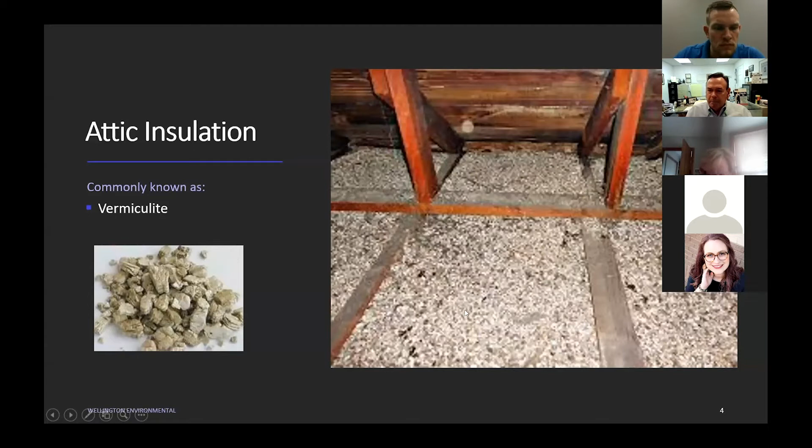Now, vermiculite, if you've seen it before, it kind of looks like cat litter in some respects, or it looks kind of like potting soil. This is what it looks like in an attic when you uncover it. Sometimes it has fiberglass on top of it or other insulation on top of it. But this is what we call vermiculite. It looks like mica, and it's very lightweight, and it was easy to get, and we'll talk about where it came from.

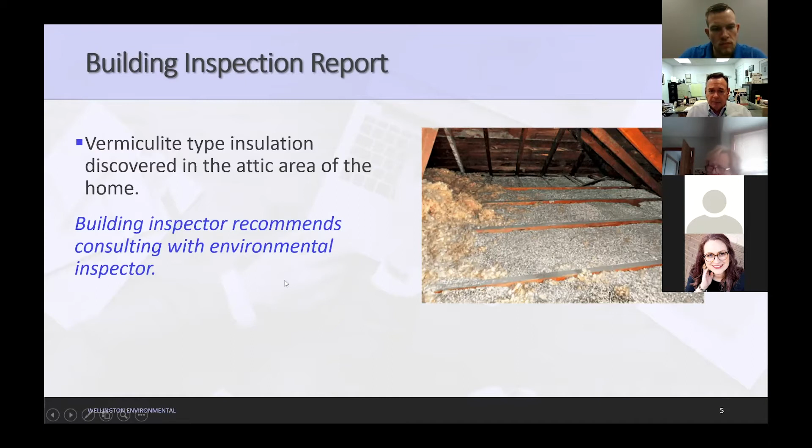But you may end up with a building inspection, and all of a sudden the building inspector says, hey, we've got vermiculite in the attic. What they've done is they've reached into the attic and tested the insulation, or looked underneath maybe the fiberglass, like you can see in this photo. Underneath it was vermiculite, and all of a sudden they say, you know what, you probably ought to test it, or you ought to have an environmental inspector look at things when you run into this.

Let me tell you how this evolved in the past. I've been in business for 33 years here at Wellington Environmental. We used to do this before that too, but originally when somebody said, hey, you've got vermiculite, we'd go take a sample of it and we'd send it to the laboratory, and they'd do polarized light microscopy on it.

For about $78, we'd know whether or not it contained any asbestos. Well, then all of a sudden the regulations changed, and they said, well, now we want you to do transmission electron microscopy, a much more expensive and much more elaborate type of testing. Those tests usually cost about $250 each, and they want 4 samples of the attic. This is some of the governing agencies, Illinois and Missouri, saying this is needed for us to determine whether or not it is indeed asbestos-containing.

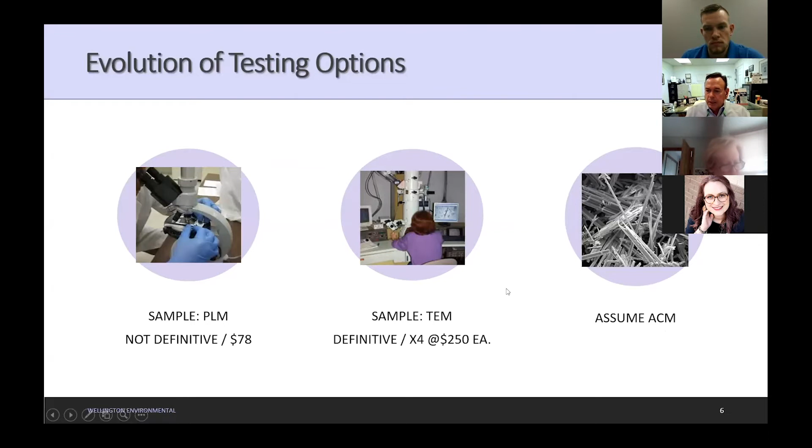And then recently, most of the regulators have all moved to, you know what, if you've got vermiculite, you just better assume that it's asbestos-containing material. I know that sounds confusing, but I'm going to explain why that is.

So this became a very popular use, putting it in attics or in concrete blocks that have the 2 holes in them. Sometimes that and sidewalls too were filled with vermiculite to act as an insulation material.

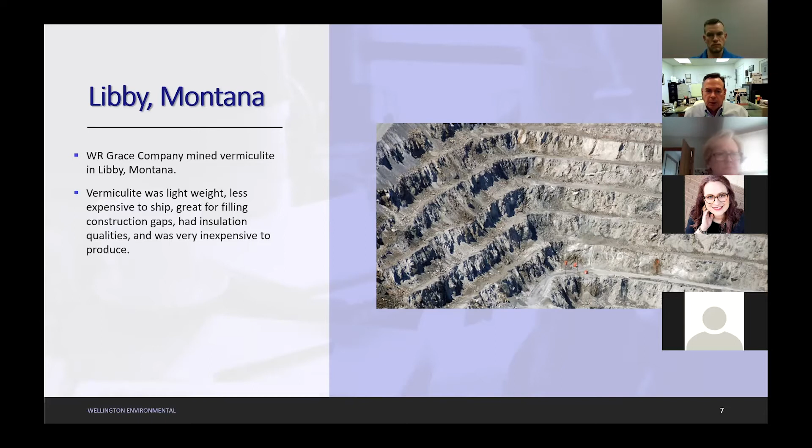People didn't really understand that, hey, we're getting vermiculite, but as time went on and W.R. Grace got more sophisticated, they found out we've got tremolite type of asbestos in this mine as well. So we don't know which bags of the insulation contain the tremolite. Eventually the EPA went in and closed down the whole city of Libby, Montana, because of asbestos exposure.

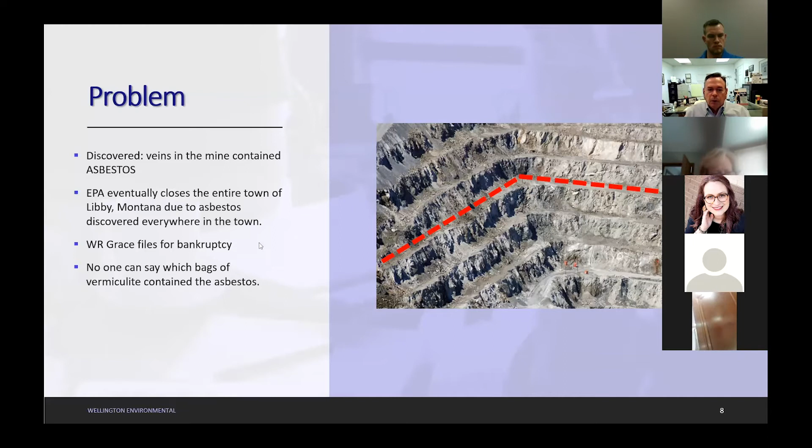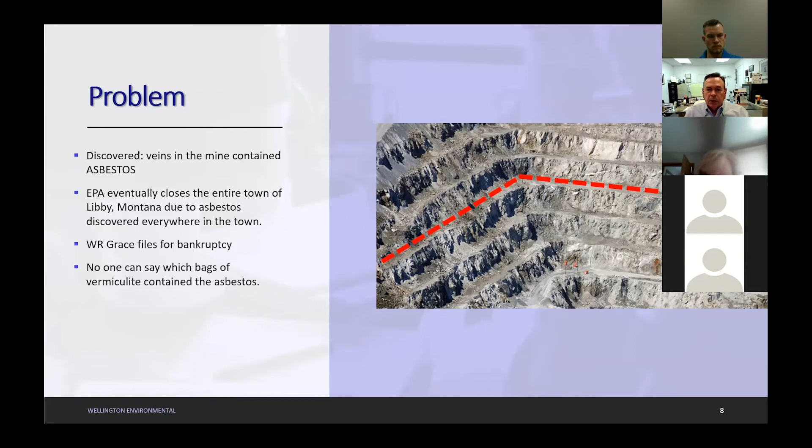This was about 20 years ago, and there were quite a few write-ups on it in a lot of different newspapers. W.R. Grace filed for bankruptcy because they couldn't afford all the asbestos claims coming out of this. So in essence, nobody can say which bag of the insulation contained the tremolite type of asbestos. You can see where this gets confusing, where we've evolved from the polarized light microscopy checking it, to the transmission electron microscopy, and now we're just assuming that it contains asbestos.

It is one of those gray areas we don't like to run into because there are no clear-cut answers. But for the most part, with vermiculite, and now with all the federal agencies pushing to say you just assume it contains asbestos, you don't want to get into a situation where you sampled it and it wasn't asbestos, and then your seller, your client, goes to sell their house in 5 years, somebody else tests it and finds out it is asbestos. So it's a gray area, and it's something I want you to be aware of.

But there is a secret that most people do not know about vermiculite, and I know it's going to upset your buyers and sellers when it's found. The secret is that W.R. Grace had to set up a trust fund. The trust fund has been set up to help pay for remediation costs when you qualify, and I'm going to explain how the qualification process works.

There are a few steps we have to take to be involved in the trust fund. We do at least one of these a week, and we have never been turned down by the trust fund yet. If it works correctly, your client will be paid 55% of the removal cost plus the re-insulation costs. So this is quite a benefit when dealing with vermiculite, and we have 2 of those projects going on this week, in fact all of them covered under the trust fund.

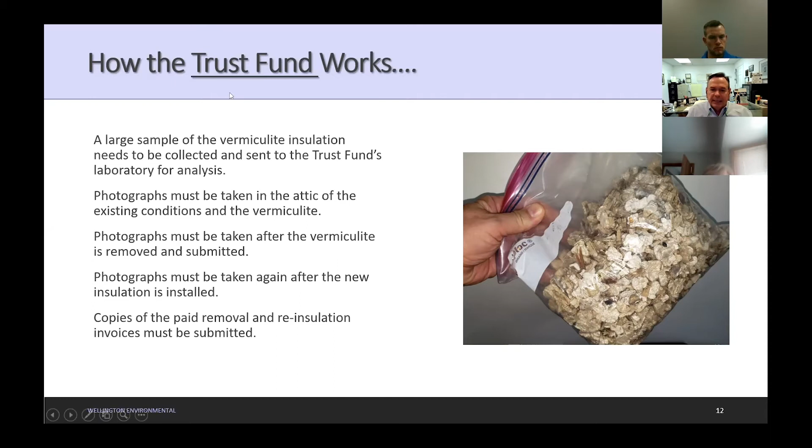Then photographs must be taken of the attic with the existing conditions, with the vermiculite in place. Then photographs have to be taken after the vermiculite is removed and the attic is empty, and again once it's re-insulated. At the end of all this, all these photographs go in to the trust fund along with a 2-page form that's really easy to fill out. This is so they can make sure they're not getting ripped off, that the photographs all look like they're coming from the same house and that this indeed really did occur. So that's kind of how the trust fund works.

The best thing is you really should focus your client on the benefit, because they're going to be upset with the fact that if they're the seller and all of a sudden they've got vermiculite and don't know what to do, they could be faced with the cost of removing it. Or you've got a buyer buying the house thinking, oh my God, I might have asbestos in the attic.

Maybe focus them on, hey, you've got a safer house by removing the asbestos. We've got new insulation in there. And when we re-insulate the attics after we remove it, we go back to an R40, so you're having much better energy savings in the house. So I think that's a benefit for your clients, is to try to get them to refocus on getting rid of this stuff.

They don't have to deal with it again. If they're the buyers, when they go to resell it, and if they're the sellers, it's something that they don't have to disclose to the next person.

Now let me explain quickly how we remove it, just so you understand. When we first started 33 years ago, we used to hand vacuum this out with special HEPA vacuums, and then we'd bag it up in the attic, and put it through that little hole in the ceiling, and then we'd take all these bags out of the house, so we had people running through the house all day long.

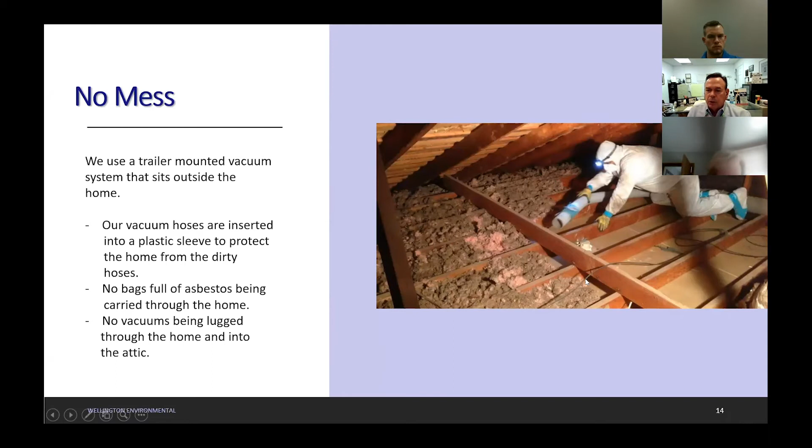What we do now, we have a trailer-mounted vacuum system that's outside the house, and we use this hose, a 6-inch diameter hose that goes in there, and we vacuum everything out, and that hose runs out a window or something, so nobody is going through your house with bags of asbestos. We also put a protective plastic covering over the hose as it travels through the house, so it's clean and won't put marks on doors and things.

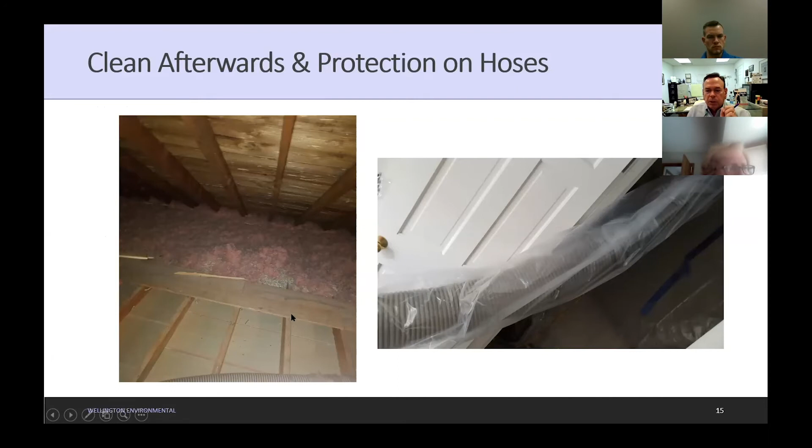Over here on that left-hand photo, you can see where we vacuumed out the vermiculite and the existing fiberglass, and how clean it is afterwards. So it's a much faster process, much easier to do, and of course it's much cheaper now because of that process.

Here's a house right over in Webster Groves, close to where you all are. We just did the attic about 4 weeks ago, and ran it out of a bathroom window.

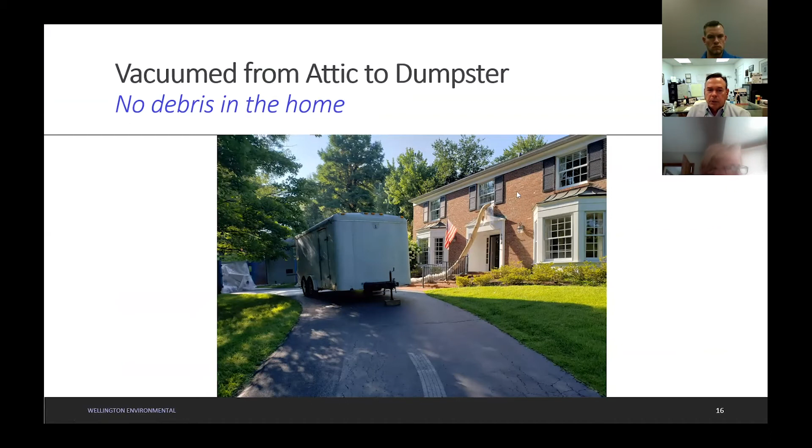This plastic sheet that you see hanging down from the window is to protect the house from the hose knocking into the wood, so we don't leave any marks. But it goes right outside, so it's a much faster, cleaner way to operate the whole system.

Now, on review, so you understand a little bit about where the vermiculite came from - it came from Libby, Montana, and the reason why it's such a gray area now is the fact that it had multiple veins of tremolite type asbestos that went through the vermiculite mine. So we can't really ever say which bags of the insulation contain the asbestos.

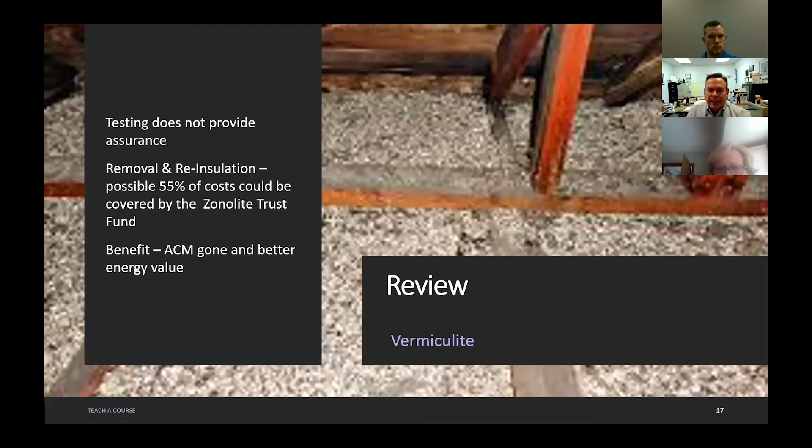I understand it can be a problematic issue, but I wanted you to understand at least where it came from, and our secret, the trust fund, because paying 55% of all the cost of removal and re-insulation is terrific, and we get people that use that all the time.

Now, I thought it might be beneficial in this first class to tell you a little bit about asbestos. We'll just go through some of the basics.

Since we're talking about tremolite, which is one type of asbestos, I do want you to understand we run into homes in Webster, Kirkwood, Sappington area, all these areas. If the house was built before 1980, there's a good chance there's asbestos someplace in that house.

Asbestos was manufactured into 3,000 different building materials, so you can almost always find asbestos someplace, and sometimes it's going to be in strange places. I'll show you a couple pictures, but most of the time we're going to see it in the usual suspects.

But I want you to understand why asbestos was used in so many things. The reason is because it's an extremely strong fiber, and it was mixed in with other things, becoming a great strength binder for when other materials were made - for instance, floor tile or pipe insulation and things like that.

It was also non-flammable. So the amazing thing is I've seen buildings burn down, and the only thing left is the asbestos. It's an incredibly flame-resistant product.

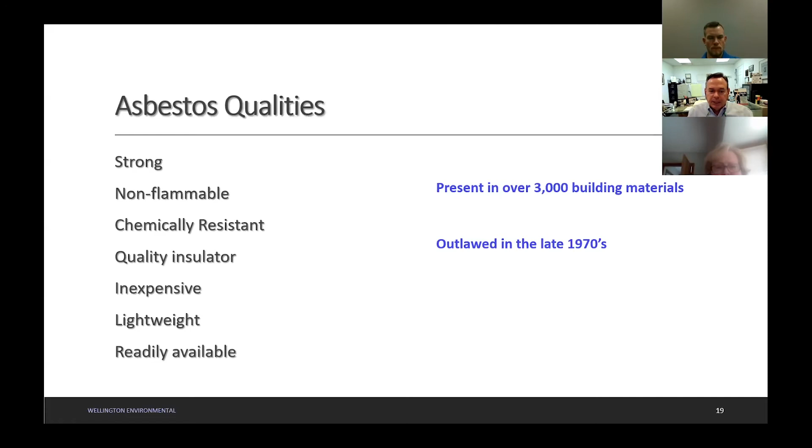Asbestos was used because it was a quality insulator. It was like vermiculite—very lightweight, inexpensive, and readily available.

For those of you that like trivia, the Greeks used to weave their tablecloths out of asbestos. They'd have these great big feasts, then wrap up all the food and everything on the table in the asbestos tablecloth and throw it into the bonfire. After about two hours, they'd pull the tablecloth back out and it would be unscorched, but all the food and everything else would be gone. It was like their own dishwashing system.

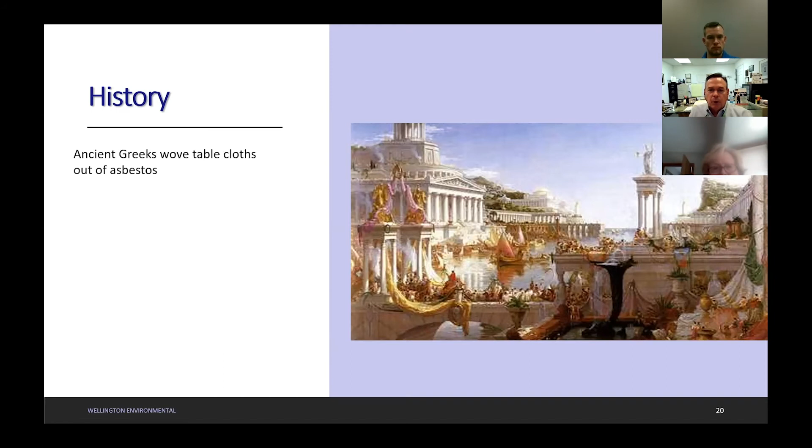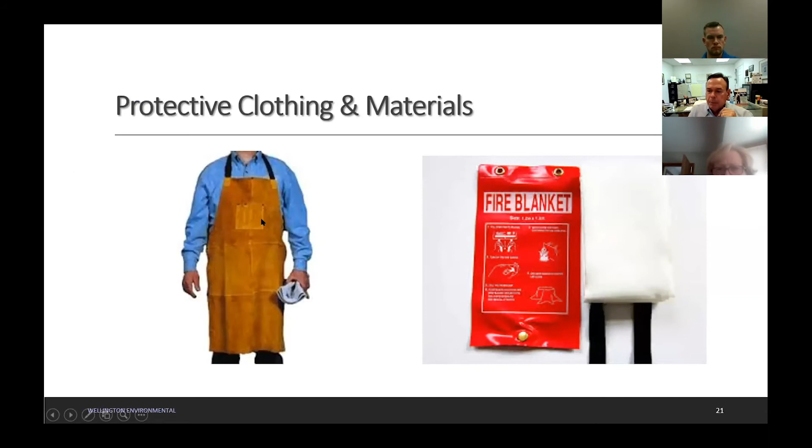So asbestos has been around for a long time and has been used in quite a few different products. When I was in graduate school, I used to work at Carondelet Foundry, and we made fire hydrants. We used to wear asbestos aprons so we wouldn't catch our clothes on fire. There are many different materials—over 3,000—that contained asbestos.

Another trivial point: they even used asbestos snow in the movie White Christmas, and in a lot of Hollywood productions, because it was a great product. It was lightweight, it was clean, and it was nice and white when they used it. It was just one of those things where they didn't know the hazards at the time.

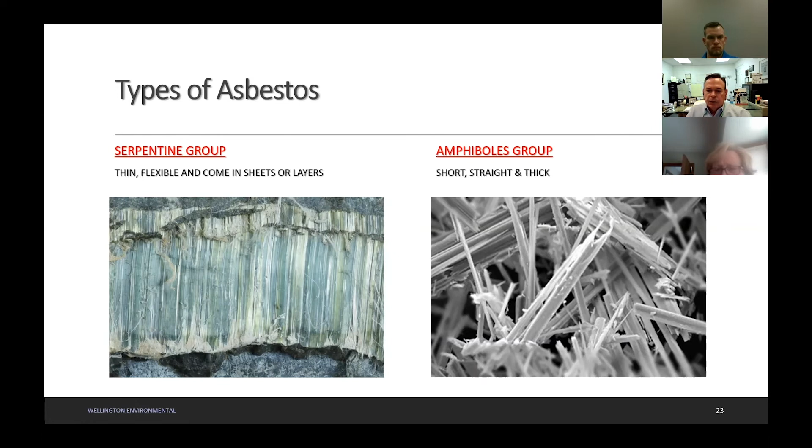Now, when we look at whether or not a material contains asbestos—this isn't something you need to remember, but this is how it happens for us as licensed inspectors—we take a sample of it, and it goes to a microscopist to look at it under a microscope. The first thing they do is check if it falls into one of two groups of asbestos, because they look different under the microscope. If it falls into one of those two groups, it could be either chrysotile type asbestos, or one of the other five types: amosite, crocidolite, tremolite, actinolite, or anthophyllite.

98% of all the asbestos in the U.S. is chrysotile type. Now you might say, well, we just talked about tremolite and vermiculite—tremolite is the main asbestos type in vermiculite. But when you consider all the rest of the 3,300 products made out of asbestos, chrysotile is the most common, and it comes from Canada.

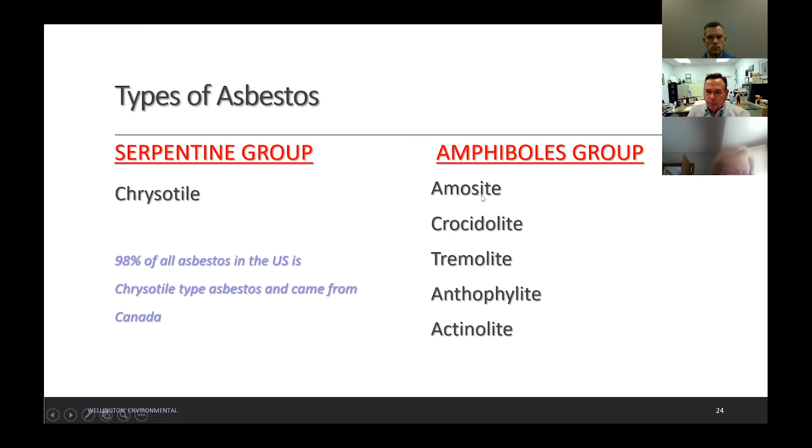Amosite is the second most common type of asbestos, and it comes from Africa. It's important for those of us who remove asbestos to understand the type, because chrysotile will accept water, meaning we can spray it down with a mist and it will settle to the ground faster. Amosite will not—water isn't attracted and won't attach to it. So amosite stays in the air much longer, and we need to use a special surfactant to get it out of the air.

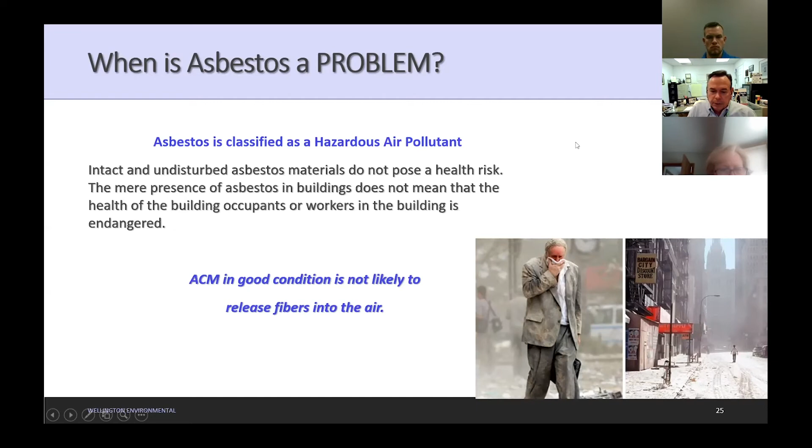The problem is, when it's airborne, asbestos is classified as a hazardous air pollutant. We all remember the photographs from 9/11, because those buildings had fireproofing as well as pipe insulation that contained asbestos. We worry about asbestos when it becomes airborne, since it's an air pollutant and not a chemical that you'd drink, like Clorox, and know immediately that you're going to be sick.

Asbestos has a latency problem—it takes between 15 and 40 years for it to fully develop in our mesothelium, or the pleura of our lungs. So you'll hear about the two most common types of asbestos-related diseases: asbestosis and mesothelioma.

For the most part, if you're watching late night TV and see all the lawyers and doctors advertising, they want to know if you worked in a facility and have you checked for mesothelioma. The reason is mesothelioma is only caused by asbestos exposure, and it's always fatal, whereas asbestosis can be caused by other types of exposure. So the lawyers are really going after the mesothelioma cases.

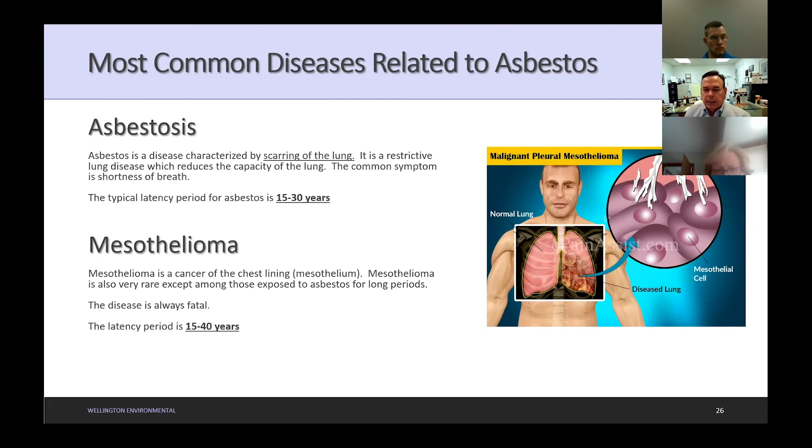If you've known anybody who's had mesothelioma, it's a very painful disease, because every time you breathe in or out and your lungs expand and contract, it's very painful due to the scar tissue built up inside the lungs. So when we talk about asbestos being a hazardous air pollutant, you'll often see on a building inspection report that the asbestos is friable.

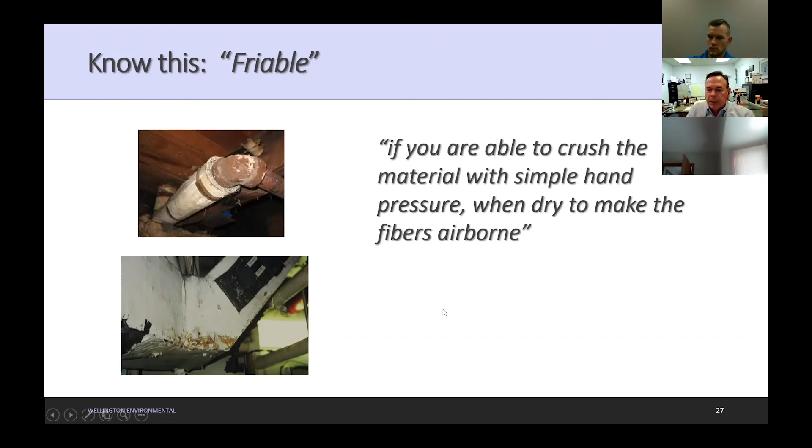Friable is a term the EPA came up with, and what it means is can it become airborne? If you can take a piece of it with simple hand pressure when it's dry and crumble it, then it can become airborne. Friable is a word you may see in reports, and that's something you should be aware of, in that it means it's dangerous.

Many times in homes in the Central West End or older homes in U City, if the insulation is in good shape and still has the jacketing on it, and the boiler system's still being used, we recommend repairing it and encapsulating it. Similar to when you break your arm and the doctor sets it in a cast, it'll last decades and decades, it'll last forever. This is a great material, we just don't want it to become airborne.

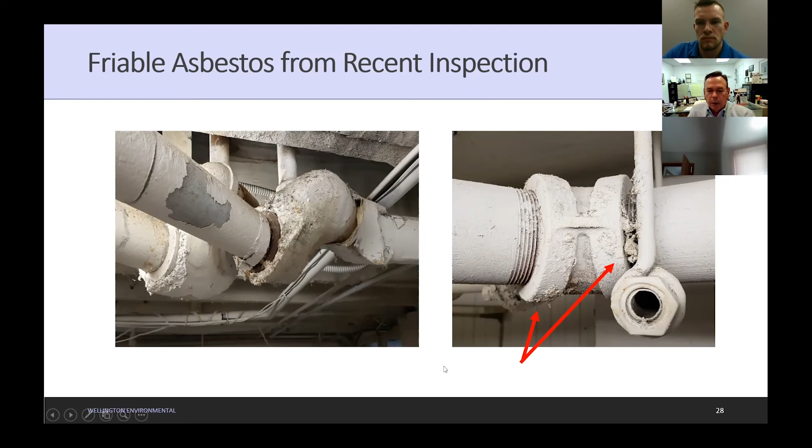Now, friable, and then you hear non-friable. Non-friable can be something like floor tile. So all of a sudden you're selling a house and somebody says, hey, that's asbestos tile in the basement. Because it's that 9-inch by 9-inch tile, those are the measurements, 98% of the 9-inch by 9-inch tile contains chrysotile type asbestos, plus the mastic, the glue underneath it, also contains asbestos. 12 by 12-inch tile, if it was made before 1980, can contain asbestos as well.

But this is a non-friable material. So if you've got a buyer or seller and they say, I've got floor tile in the basement, it's in good condition, do I have to remove it? No, it's in great condition, you can keep it the way it is. People can still walk on it, play on it, do whatever they want. You're not going to get the fibers out of it unless you sand it or drill it. You can put new flooring on top of it, you can carpet over it, you can do whatever you want.

Now, some places like Lowe's and Home Depot won't put in new floor unless you've had your floor tested. And if it comes back as asbestos, they don't want to deal with it until it's been removed. But just so you know, it's considered a non-friable material, which means it's not a safety hazard for the house as long as it's not drilled into, sanded, or cut in some way.

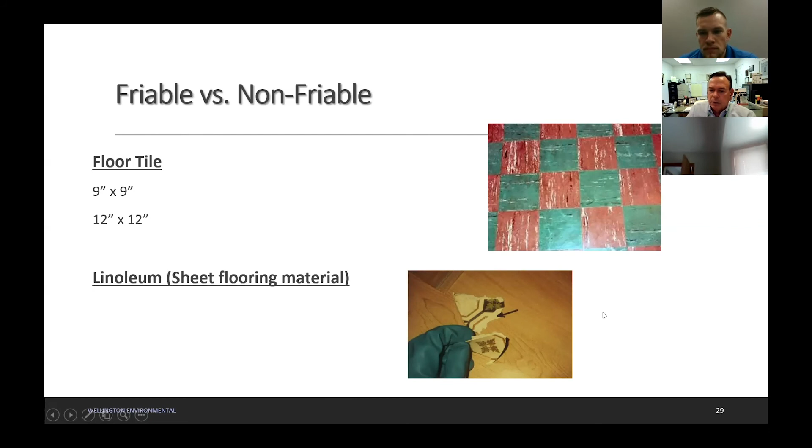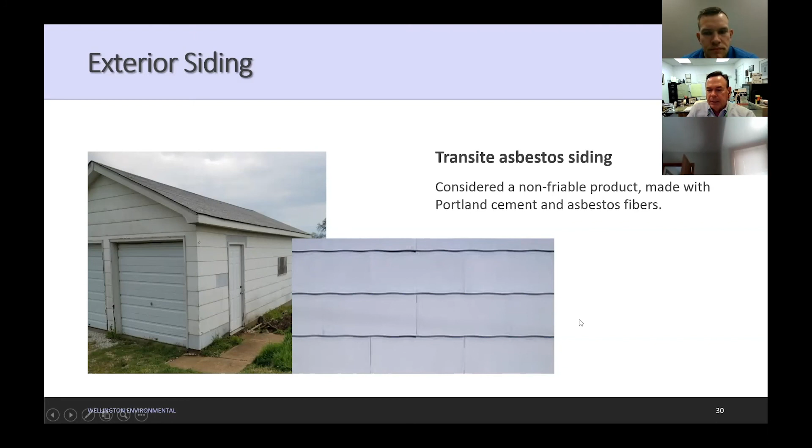Another thing you may run into, sometimes garages or homes have asbestos siding. This asbestos siding was used for multiple reasons. One, it's made with Portland cement, extremely durable, will last a century on most buildings unless somebody breaks it or destroys it in some manner. It's a non-friable material, not a danger to anybody's health. Now, if they want to re-side the garage or house, they can either put new siding right on top of it, or if they want it removed, then it has to be dealt with as asbestos. But asbestos siding is a non-friable material.

Sometimes you'll run into some homes, and we have neighborhoods in West County and other places, where whole neighborhoods mixed asbestos in with the popcorn type finish on the ceilings. To sample it costs $78 a sample, just so you know whether or not it does contain asbestos.

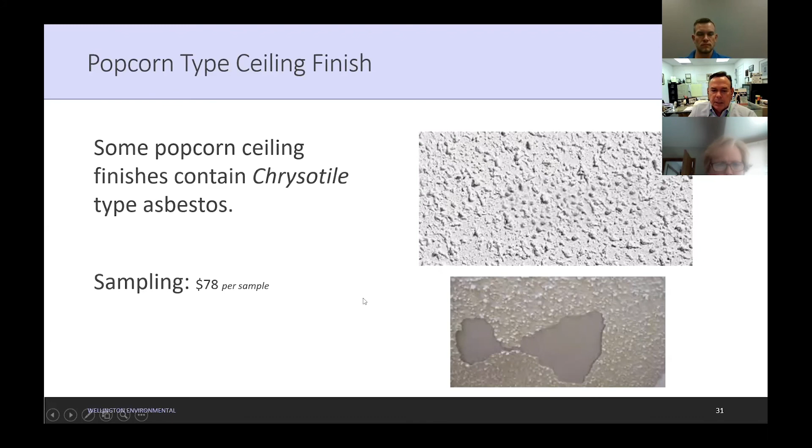So popcorn type ceiling finishes, maybe 40% of the time contain asbestos, and it really depends on whether or not the builder used it in their mixture.

Another thing that we'll run into quite often in our Sunset Hills, Webster, Kirkwood homes, Maplewood, is asbestos tape material. This asbestos tape is normally found on the outside of the ductwork, so it's not in the airstream. Since it's on the outside of the ductwork and not in the airstream, we recommend repairing and encapsulating it.

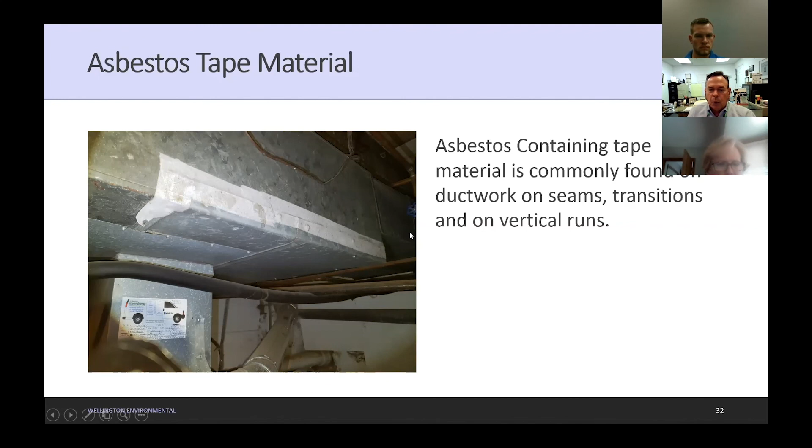That means basically going over it wherever it's delaminated, such as here where it's starting to fall off. We reinforce that with a fiberglass patch, and then we coat these similar to when you break your arm and go to the doctor and they set it in a cast. It'll last decades, and it's great. It's on the outside of the airstream.

What you're going to find with a lot of building inspectors, on this left photo, the way you see it in some homes is you just see the trailing edge of it. When we go from our horizontal runs of ductwork and all of a sudden transition up into the walls, that's where they lined the ductwork with this asbestos cloth material. It's made with chrysotile type asbestos.

Here I've got a house over on Litzinger that just a couple of weeks ago they were rehabbing, and they opened up the walls for the kitchen to go into the family room. Here we've got two runs of ductwork that you can see the actual asbestos on the outside of it.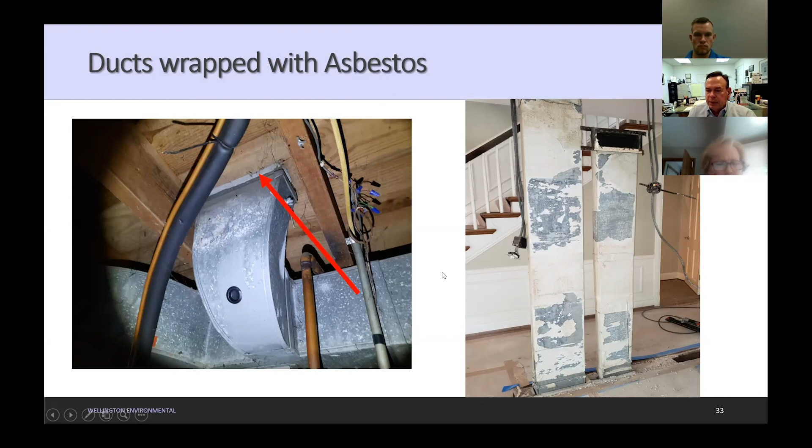Now, in these cases, it's easy for us - we just wrap this in plastic and take out the whole sections. But for the most part, when you've got these trailing edges of asbestos, we just repair and encapsulate and leave it there. So you may run into that stuff, and sometimes it's inside the wall cavities of the homes.

I want you to remember basically the term friable when we talk about asbestos means that it can be crumbled with simple hand pressure when it's dry and become airborne. So when we've got a situation like that, we probably would want to remove it unless we can do a repair that somebody else isn't going to damage.

So in a lot of cases, pipe insulation, tape insulation - we recommend repairing those rather than removing them. It's much cheaper, much faster. It's better for your clients, and nothing's happening.

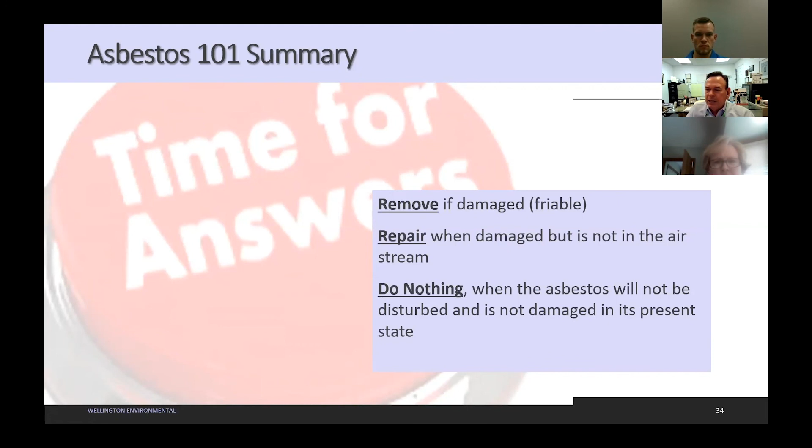And then sometimes you may have asbestos floor tile, items like that, or that asbestos transite on the exterior of the building that you really don't need to do anything with. They're just one of those things that, unfortunately, contain asbestos, and it's something you should be aware of. But if you ever have questions, certainly you can contact us.

Now, I know I threw a lot at you real quick with the vermiculite and with asbestos and what we're doing. This was basically because one of the other agencies said, since we're all locked up and nobody's coming to our offices anymore to train, we thought it might be good to have some educational series.

The next two that I have are on mold. And the next one in particular, since it seems like we run into mold almost daily - and why is that? I'm going to explain the why and what the three main things are that mold needs to colonize, in that next class, and it's about the same length as this one.

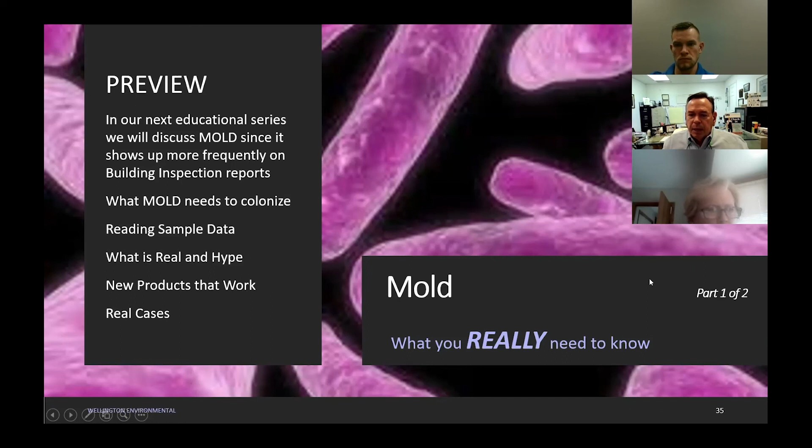And then I want to tell you about some cases where more and more building inspectors are taking air samples, and why that is. But then all of a sudden you get a reading and they can't tell you what to do to correct the situation. So those are some of the things we're going to talk about next time and what we need to look at so that we know what's happening. Certainly I can address any questions if you have them, but I appreciate you all even taking time to come to this today.